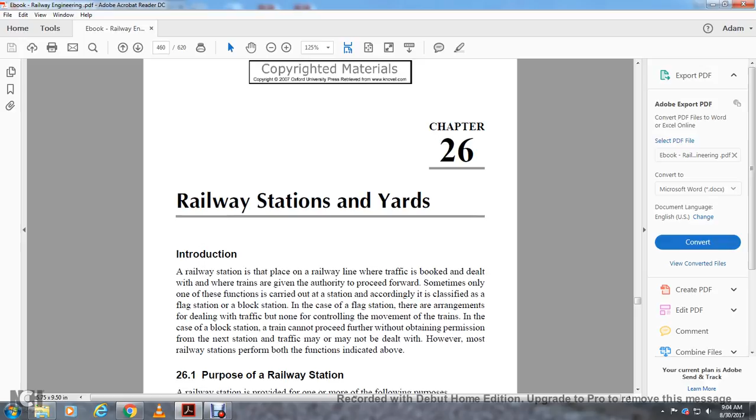In the case of the block station, the train cannot proceed further without obtaining permission from the next station. Traffic may or may not be dealt with; however, most railway stations perform both the functions indicated above.

26.1 Purpose of the railway station. Railway stations are provided for one of the following purposes: to entrain and detrain passengers, to load and unload goods and parcels, to control the movement of the trains, to enable the trains to cross each other in the case of a single line section, to enable the fast trains to overtake the slow ones, to enable the locomotive to refuel,

with diesel, water and coal, to attach and detach coaches and wagons to the train, to collect food and water for passengers, to provide facilities to change engines and crew staff, to enable the sorting of wagons and bogies to form new trains, and to provide facilities to give shelter to passengers in case of emergency, floods, accidents and disrupted traffic.

26.2 The selection of the site of the railway station. The following factors are considered in the selection of the site of the railway station. Adequate land. There should be adequate land available for the station building, not only for the proposed line, but also for future expansion of the area, which should be without any religious buildings and level.

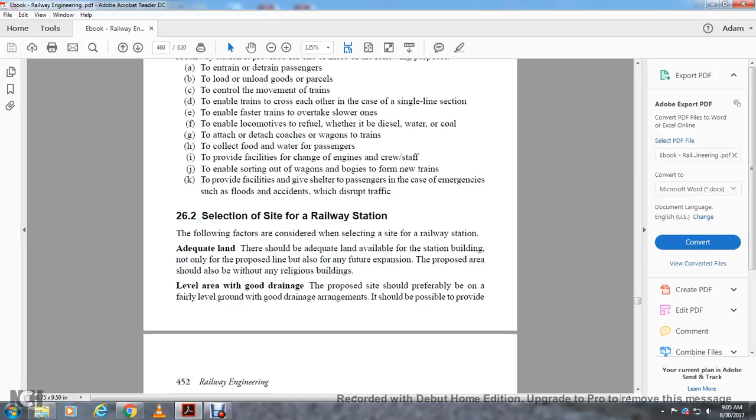Area with good drainage. The site should preferably be on fairly level ground, meeting the gradient requirements if possible. Provide the maximum permissible gradient in the yard. In India, the maximum permissible gradient adopted is about 1 in 400. A gradient of 1 in 1000 is desirable.

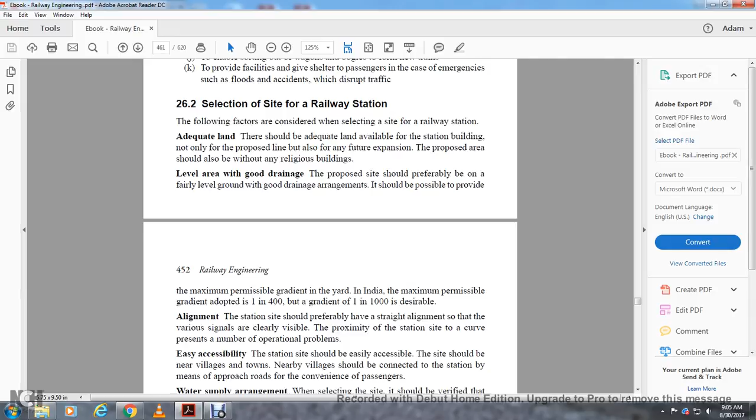Alignment. The station site should preferably be on a straight alignment so that the various signals are clearly visible on approach. If the station site is curved, it presents a number of operational problems. Easy accessibility. The station site should be easily accessible.

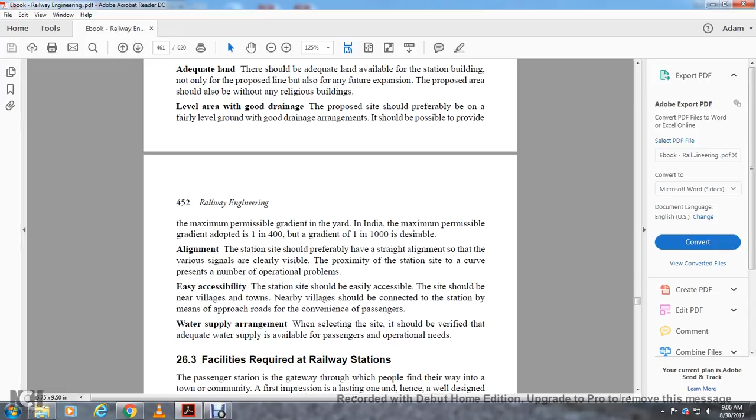The site should be near villages and towns, and nearby villages should be connected with the station by means of approach roads for the convenience of passengers. Water supply arrangement. When selecting the site, it should be verified that an adequate water supply is available for passenger and operational needs.

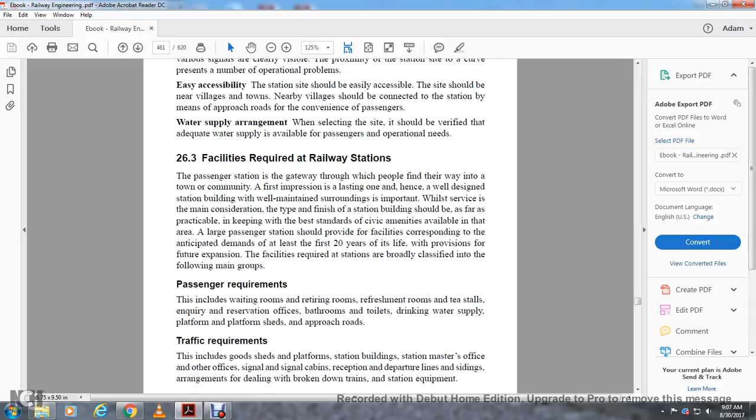A large passenger station is provided with facilities corresponding to the anticipated demands of at least 20 years of life and provision for future expansion. Facilities required in the station are broadly classified in the following main groups. Passenger requirements. This includes waiting rooms, retiring rooms, refreshment rooms, tea stalls, inquiry and reservation offices, bathrooms, toilets, drinking water supply, platforms, sheds, and approach roads.

Traffic requirements. This includes goods shed, platform, station building, station master's office, other offices, signal cabins, reception and departure lines, siding arrangements for dealing with broken down trains, and station equipment. Locomotive, carriage and wagon requirements. This includes locomotive shed, watering and fueling facilities, turntables, inspection pits, ash pits, etc.

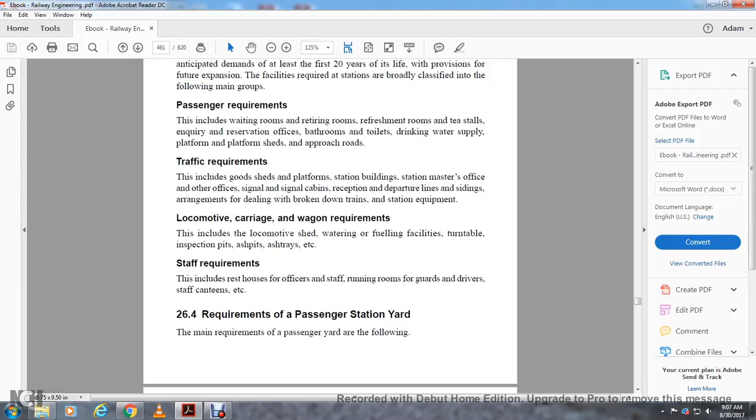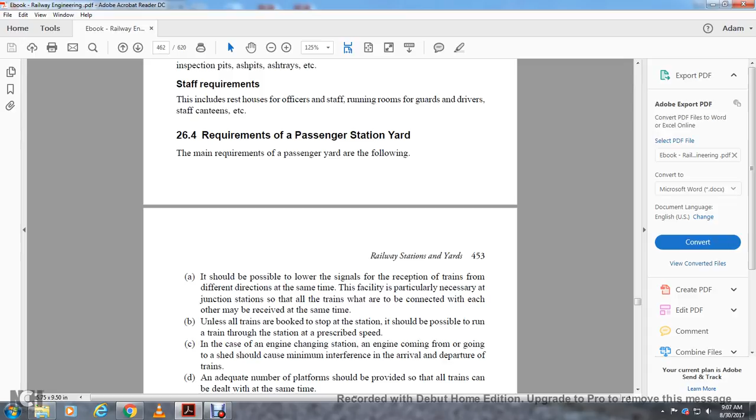Staff requirements. This includes rest houses for officers and staff, staff running rooms required for guards and drivers, canteens, etc. Requirements of the passenger station. The main requirements of the passenger station are as follows: it should be possible to lower the signals for reception of trains from different directions at the same time. Such facilities are particularly necessary at junction stations, so that at all times trains connecting with each other may be received at the same time.

Unless they are booked to stop at the station, it should be possible to run the trains through the station at the prescribed speed. The engine changing, engine coming from or going to the shed should cause the minimum interference with the arrival and departure of trains. An adequate number of platforms should be provided so that all the trains can be dealt with at the same time. There should be convenient sidings where extra carriages can be stabled, either to attach to or detach from the train.

There should be provision of facilities for dealing with specific traffic such as pilgrim and tourist traffic, parcels, wagons, livestock, and motor cars.

Stable lines, washing lines, sick lines, etc. should be provided as per requirement.

26.5 Classification of railway stations. Railway stations can be broadly sorted in various classes. The class is based on two main considerations: operational considerations. As per general subsidiary rules, Indian railway stations are classified into block stations and non-block stations. Block stations are further classified as A class, B class, C class stations. Non-block stations are classified as D class and flag stations.

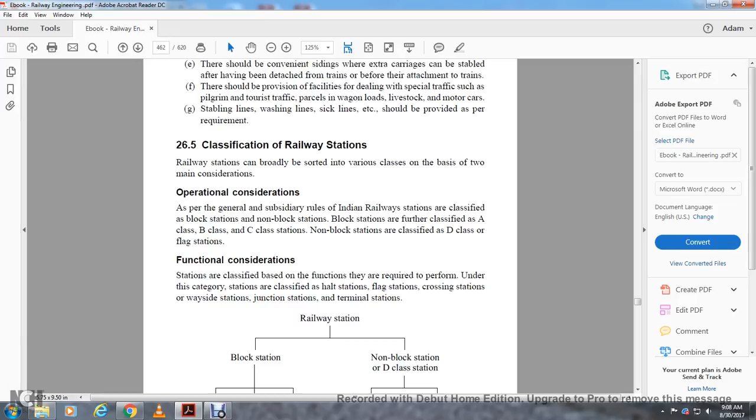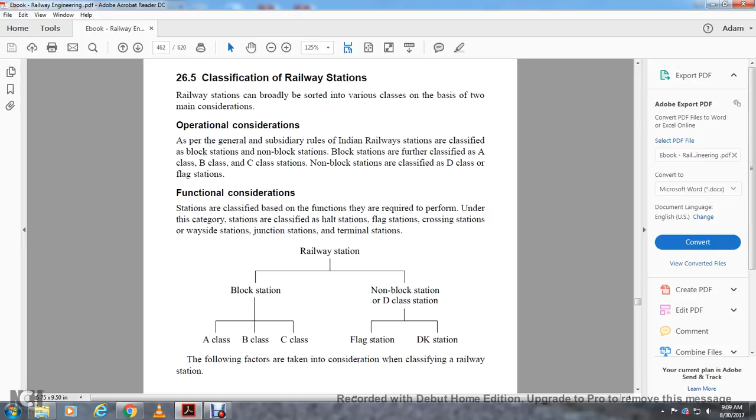Functional considerations. Stations are classified by the functions required to be performed under this category. Stations are classified into halt stations, flag stations, crossing stations, wayside stations, junction stations, and terminal stations. Railway station: block station, A, B, and C class. Non-block station: D class station, flag station, DK station.

The following factors are taken into consideration when classifying railway stations: less expenditure regarding the provision of the least number of signals, flexibility, shunting operation, increasing line capacity, faster movement of the train.

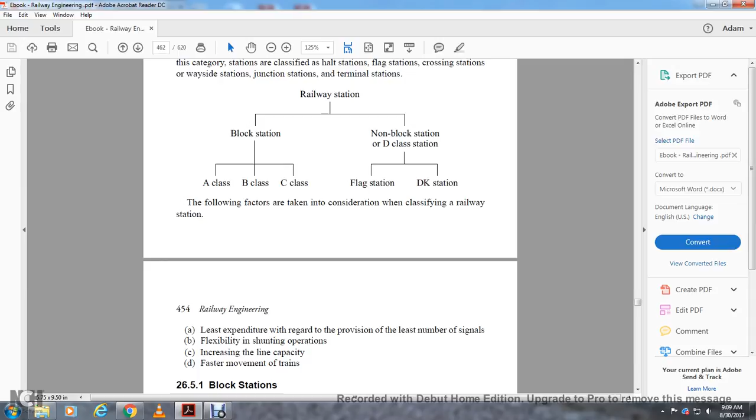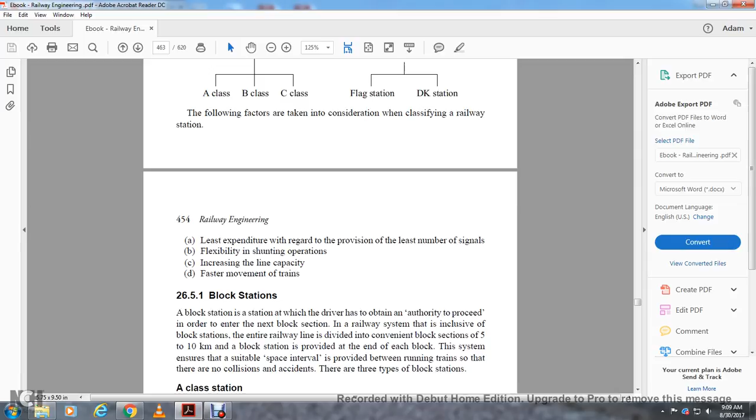26.5.1 Block Station. A block station is a station where the driver has to obtain authority to proceed in order to enter the block section. The entire railway line is divided into convenient block sections of 5 to 10 kilometers. Block stations are provided individually, each with the block instruments. The system ensures a space interval between running trains so that there are no collision accidents. There are 3 types of block stations.

The A-class station is normally provided on a double line section such that line clear cannot be granted to the rear station unless the line on which the train is received is clear and facing points are locked. No shunting can be done after the line clear has been granted. The A class station is suitable for sections where traffic passes rapidly, and it is essential for the driver of the train to have advance knowledge of the layout of the block station.

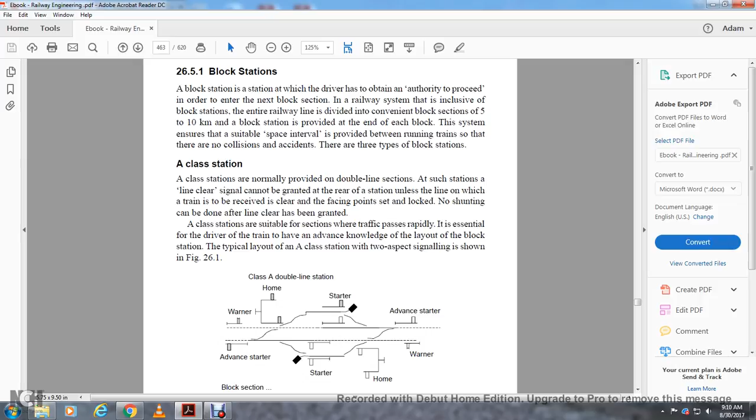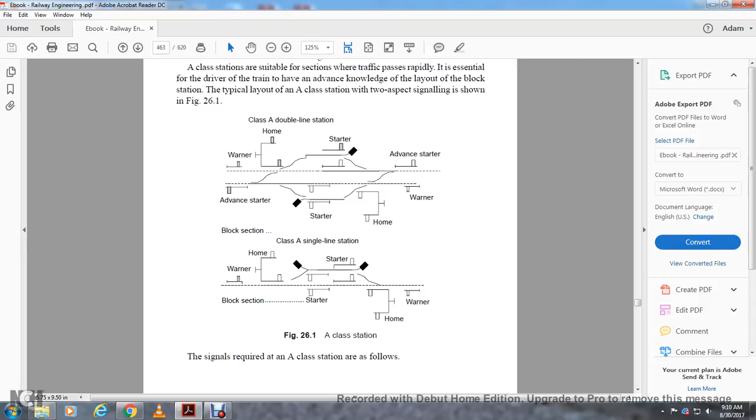The typical layout of the A-class station with 2 aspect signals is shown in Figure 26.1, which shows the A-class station: Warner, home, advanced starter, home, Warner, advanced starter, double line, class A; single line class A station: Warner, block section, home, starter, home, Warner. The signals required in the A-class station are as follows.

A Warner signal is placed at a warning distance from the home signal, and indicates whether the section beyond is clear. The home signal is the first stop signal. The starter signal is placed at an adequate distance from the home signal and marks the point up to which the line should be cleared before the train is given permission to approach. The advanced starter signal is optional, but allows drivers to further increase the speed of the train.

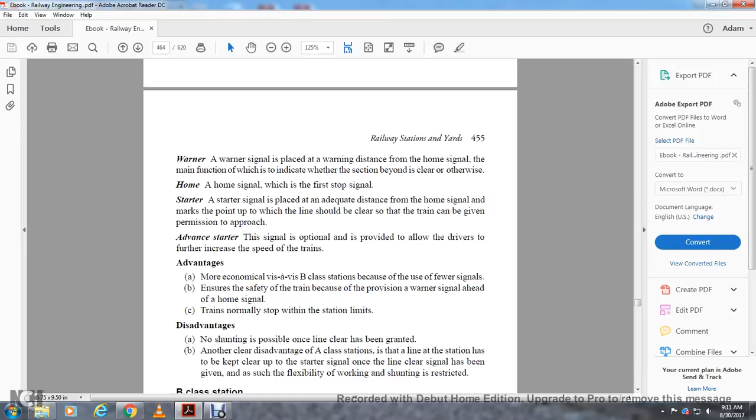Advantages: more economical than B class because of the use of fewer signals. Ensures safety of trains because of the provision of a warning signal ahead of the home signal. Trains normally stop within station limits. Disadvantage: no shunting is possible once line clear has been granted. Another disadvantage of the A-class station is that the line of the station has to be kept clear up to the starter signal once the line clear has been given, and as such, the flexibility of shunting is restricted.

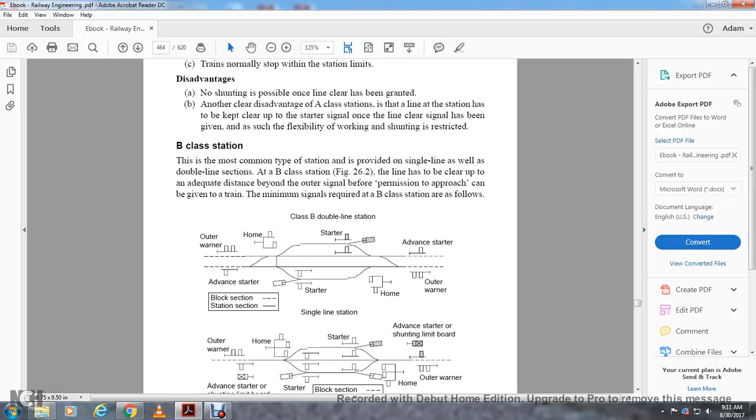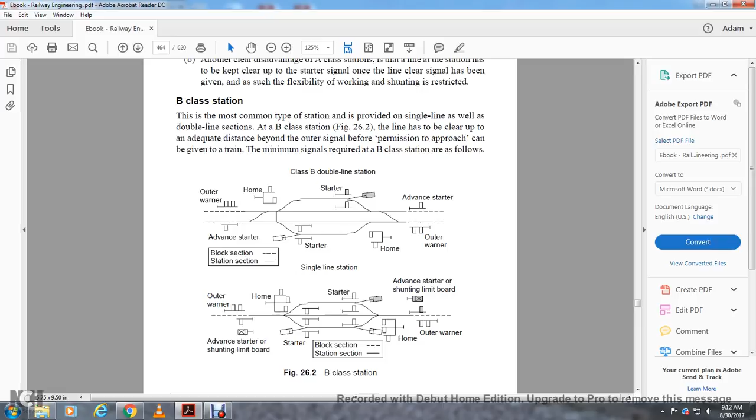Outer Warner, advanced starter, home, starter, home, advanced starter, outer Warner, class B double line station. Single line station: outer Warner, advanced starter, shunting limit board, home, starter, home, advanced starter, shunting limit board, outer Warner; block section is the dotted line, full line is the station section.

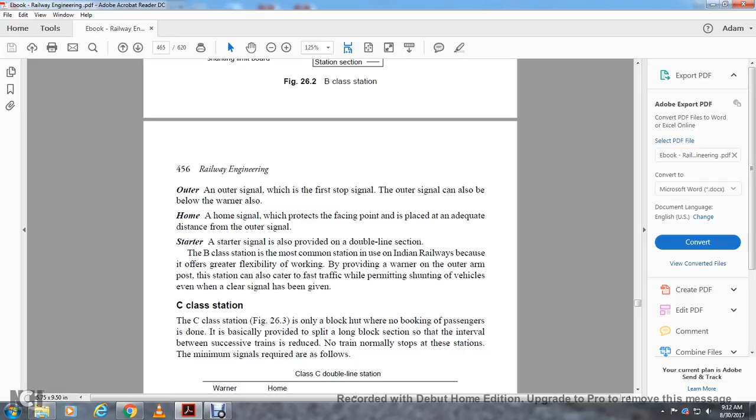The outer signal is the first stop signal. The outer signal can also have a Warner below it. The home signal protects the facing points and is placed at an adequate distance from the outer signal. The starter signal is provided on a double line section. The B class station is the most common type of station in Indian Railways because it offers greater flexibility in working, providing the Warner with the outer arm on the same post at the station. It can also cater to fast traffic while permitting shunting of vehicles, even when the line clear has been given.

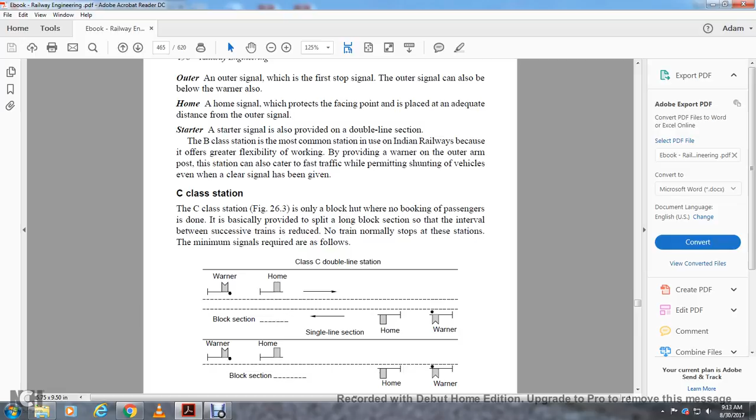Your Class C station is only a block hut where no booking of passengers is done. Basically, they are provided to split a long block section so that the interval between successive trains is reduced. No train normally stops at these stations. Minimum signals are required as follows. This shows the double line section: Warner, home, block section. Single line section: home, Warner, home, block section, home, Warner.

The Warner signal is placed with adequate warning for the home signal, indicating whether the section ahead is clear or not. The home signal is the first stop signal. The advantage of the C-class station is that it ensures faster movement of trains and increases line capacity. The disadvantage, however, is that no shunting is possible. Trains cannot stop at these stations.

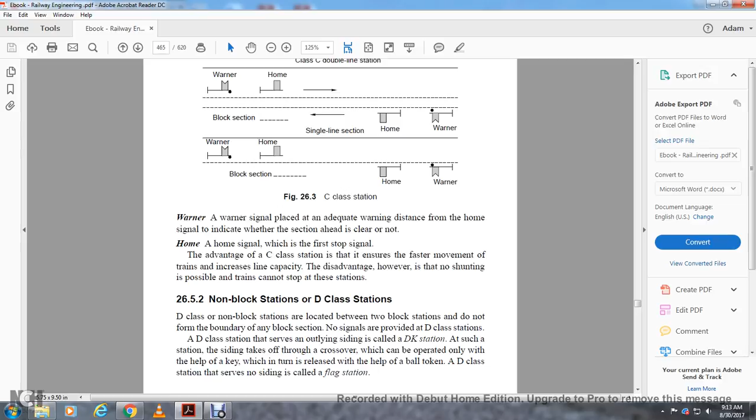26.5.2 Non-block stations or D-class stations. D-class or non-block stations are located between two block stations and do not form the boundary of any block section. No signals are provided in the D-class section. A D-class station serves as an outlying siding, which we call a DK station, such as a station siding or crossover, which can be operated only with the help of a key, the ball token release. A D-class station with no siding is a flag station.

A halt is simply a station where the train stops on the railway line. The halt is usually only a rail level platform, with a name board at either end, and sometimes a small waiting shed is provided with it. There is also a booking office. There is no yard or station building. Some selected trains are allotted stops at such stations to enable passengers to detrain.

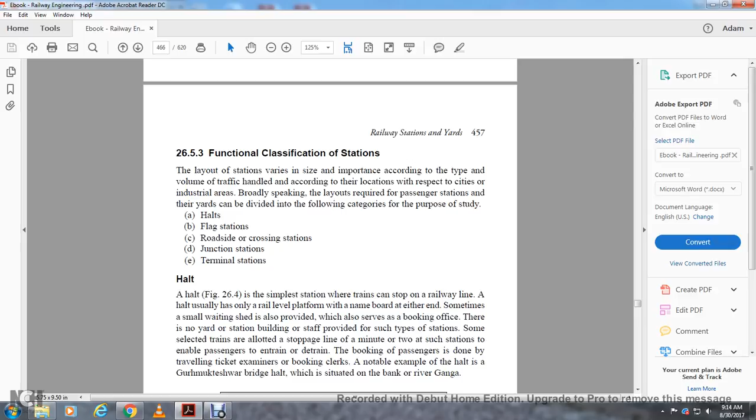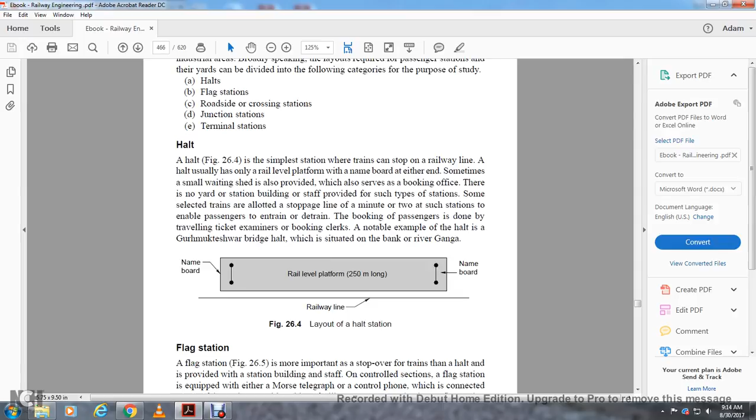The booking of passengers is done by travelling ticket examiners or booking clerks. An example of a halt is Gurhmukteshwar Bridge, situated on the bank of the Ganga. This shows the layout of the halt station: name board, rail level platform, rail line, name board.

Your flag station. The flag station is more important than the halt and is provided with a station building and staff. A flag station is equipped with a Morse telegraph or control phone, which is connected to the station on either side. Each flag station is usually provided with a small waiting hall, a booking office, platforms with benches, and arrangements for drinking water. Sometimes the flag station is also provided with a siding for stabling wagons booked for that station.

Some important tasks dealt with at these stations are the following. Operation work: the main operations performed at these stations include attending to the passing and crossing of trains, giving precedence to important trains, and other work related to the stopping of passenger trains. Most stop at small stations, whereas mail and express trains stop only at major stations. Goods traffic: these deal with parcel traffic only piecemeal. Wagon-load goods traffic is no longer being accepted at wayside stations, as per the new policy of the Railway Ministry with effect from December 1994.

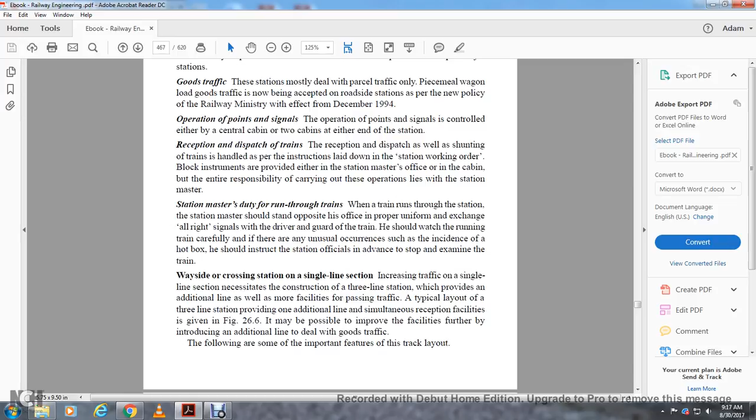When the train runs through, the station master is to stand opposite his office in proper uniform and exchange all right signals with the driver and guard of the train. He should watch the running of the train carefully. If there is an unusual occurrence, such as the incident of a hot box, he should instruct station officials in advance to stop and examine the train.

Wayside crossing station, single line section. Increasing traffic on the single line section creates the necessity for crossing stations, the construction of three-line stations which provide an additional line as well as more facility for passing traffic.

The typical layout of the three-line station provides one additional line with simultaneous reception facility, as given in figure 26.6, which makes it possible to improve facilities by further introducing additional lines to deal with goods traffic. Here are some more important features of the track layout.

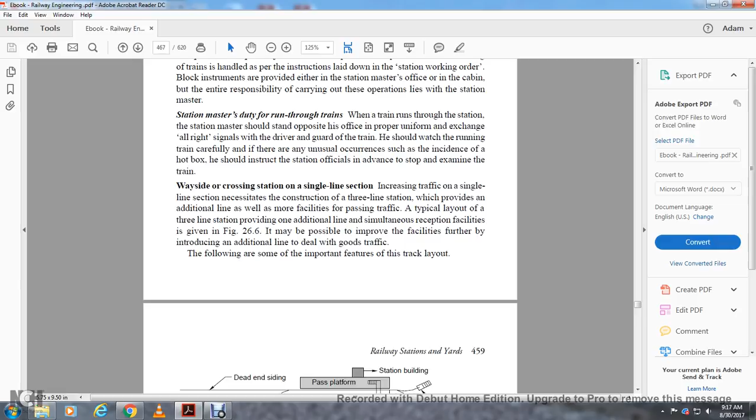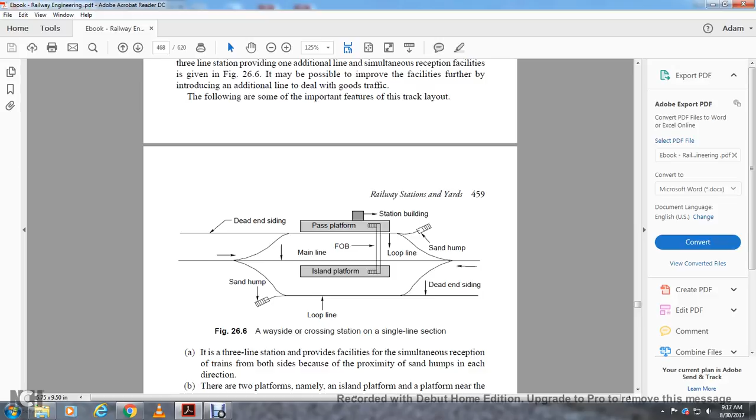Figure 26.6 is a wayside crossing station: single line, dead end sidings, coming-in line, sand hump, loop line, inside island platform, FOB, pass platform, station building, sand hump, loop line, and dead end siding.

It is a three-line station providing facility for simultaneous reception of trains, with sand humps on both sides in each direction. There are two platforms, namely the island platform and the platform near the station building.

The island platform can deal with two stopping trains simultaneously. Although goods trains also have to be stopped, they can be accommodated on the loop line with the platform, keeping the main line free from the rush of traffic.

The important trains that need to be halted can be made to halt on the platform near the station building. Dead end sidings on either side of the station accommodate wagons marked as sick.

The foot over bridge, or FOB, helps the passenger reach the island platform from the station building and vice versa.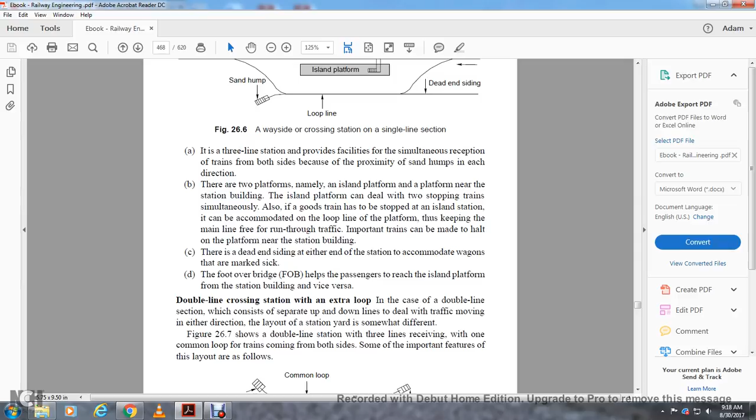Double line crossing station, extra loop. In case the double line section consists of separate up and down lines to deal with traffic moving in either direction, the layout of the station is somewhat different.

The double line station has three lines, receiving trains with one common loop from both sides. Some of the important features of the layout are as follows.

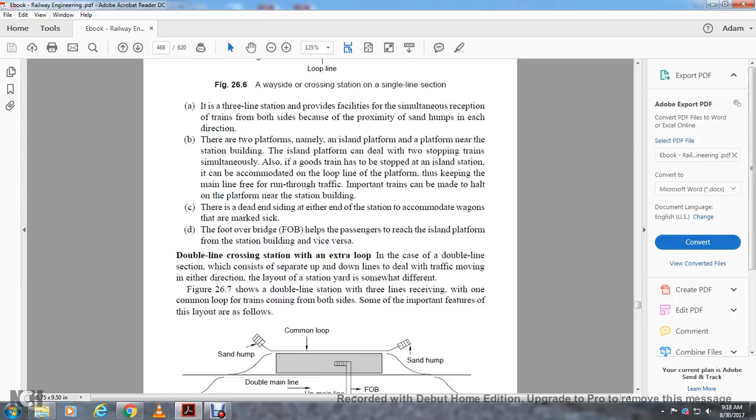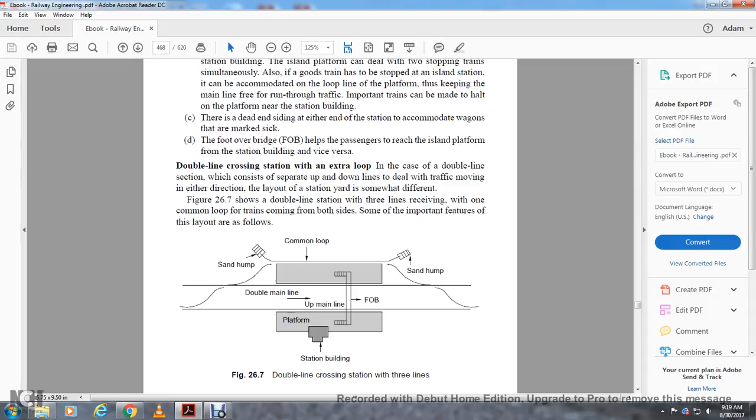In the double line crossing station, you have three lines: foot over bridge, platform, station building, the common loop, and the double main line - up and down main. There is a sand hump and common loop.

This wayside station on a double line section has almost minimum facility. In addition to the two main lines, up and down, there is a common loop to receive trains from either direction. Two of the three lines consist of two platforms - one island platform, the other beside the station. There is a foot over bridge to connect the station building with the island platform and back.

The emergency crossover is provided at either side of the station, and it can be converted into a single line station in case of emergency. Double line crossing station with four lines.

The most common layout of a station on a double line section is the four-line station, shown in figure 26.8. Important features of the layout are as follows. Figure 26.8 shows the double line crossing section with four lines.

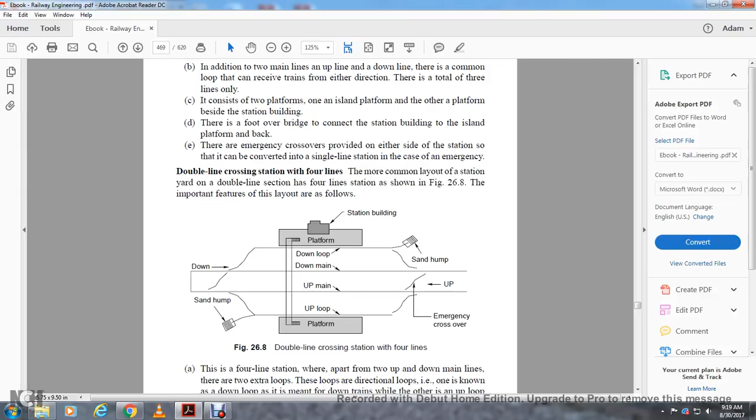The loops are directional loops: one is known as the down loop, meant for the down train, while the other is the up loop, meant for the up train. There are two platforms provided with connecting loops.

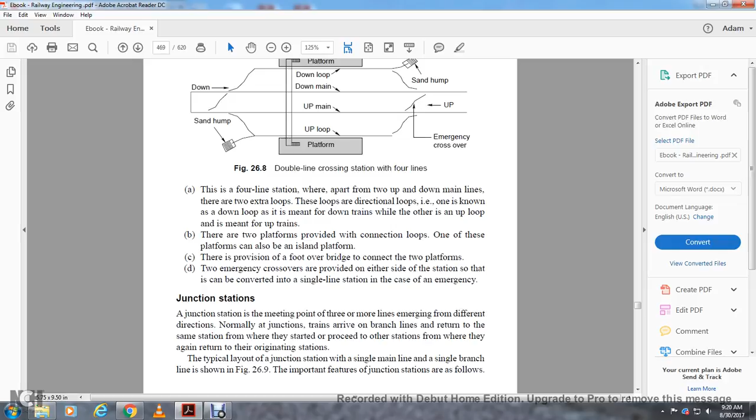One of these platforms should be maintained as the island platform. There is provision of a footbridge connecting the two platforms. The two emergency crossovers provided on either side of the station can be converted into a single line station in case of emergency.

Junction station: a junction station is the meeting point of three or more lines emerging in different directions. Normally, junction trains arrive at the branch lines, return to the same station from where they started, proceed to the other station, from which they again return to the original station.

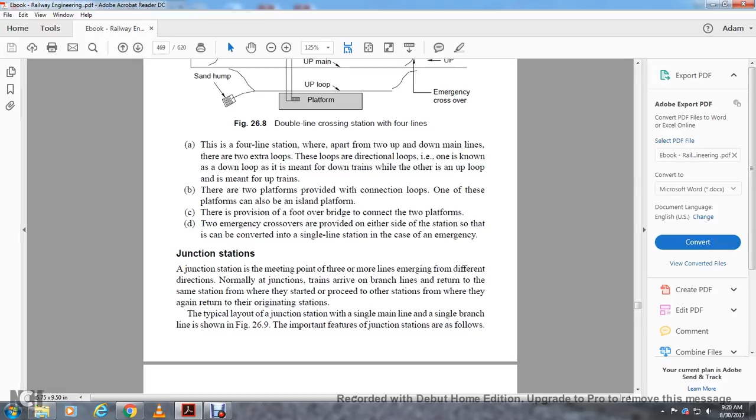The typical layout of the junction station, with a single main line and single branch line, is shown in figure 26.9. The important features of the junction station are as follows.

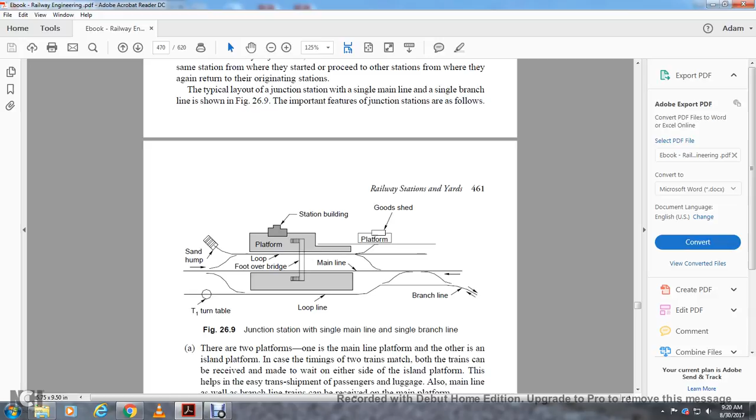Figure 26-9 shows the junction station with a single main line and single branch line. You have your T1 turntable, sand hump, foot over bridge, loop line, main line, platform, station building, goods shed, and branch lines. The two platforms: one is the mainline platform, the other is the island platform.

In case the timings of the two trains match, both trains can be received at either side of the island platform. This helps in easy transshipment of passenger luggage, and also the mainline as well as the branch line can be received at the main platform. A foot overbridge is provided for passengers to move between the station platform and island platform.

A small goods siding is provided on the loop platform to deal with goods traffic. The turntable is provided to reverse the direction of the engine if required. An emergency crossover is provided on either side of the station to help switch the single line in case of emergency. A few examples of junction stations: Ghaziabad, Allahabad, Itarsi, Nagpur, Jaipur.

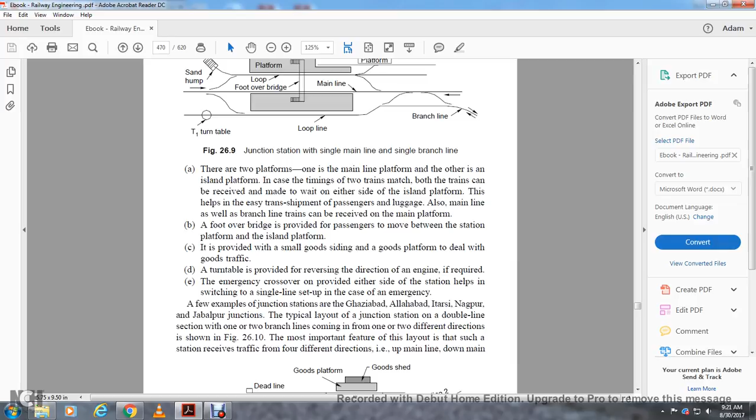The typical layout of a junction station with a double line section with one or two branches coming from one or two different directions is shown in figure 26-10. The most important feature of this layout is that the station receives traffic from four different directions: up main line and down main line.

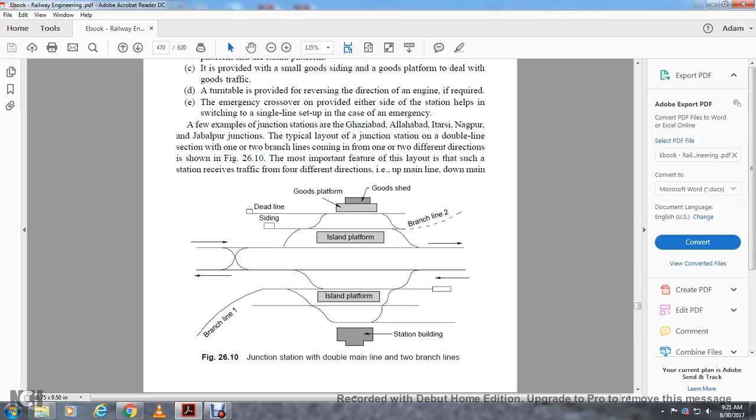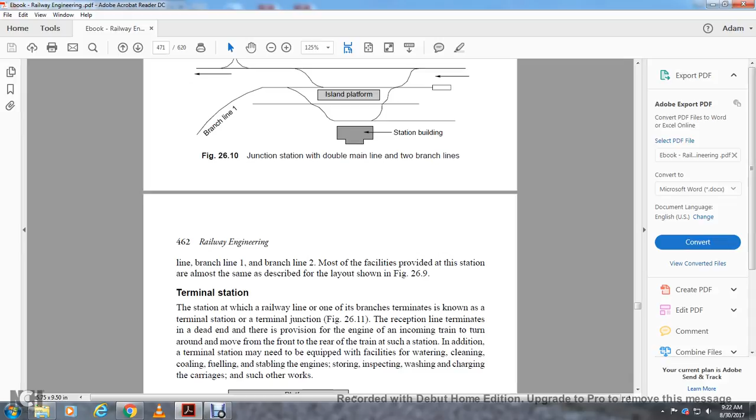Junction station, double main line, and two branches. Branch 1, branch 2, station buildings, goods sheds, goods platforms, dead line, siding, island platforms. Branch line 1, branch line 2 - most of the facilities provided in the station, almost the same as described in figure 26.9.

These are your terminal stations. A station where the railway line or one of its branches terminates is known as a terminal station, or terminal junction. The reception lines terminate at a dead end, and there's provision for the incoming engine to turn around, moving it from the front to the rear of the train at such stations.

In addition, the terminal station may need to be equipped with facilities for watering, cleaning, coaling, fueling, stabling, engine storing, inspection, washing, charging of carriages, and such other services.

Figure 26.11 shows the terminal station with a run-around line. Your concourse, platform, 3 platforms. Unimportant branch line terminal stations will have only one platform, whereas a big terminal station like Howrah and Mumbai station provides elaborate facilities.

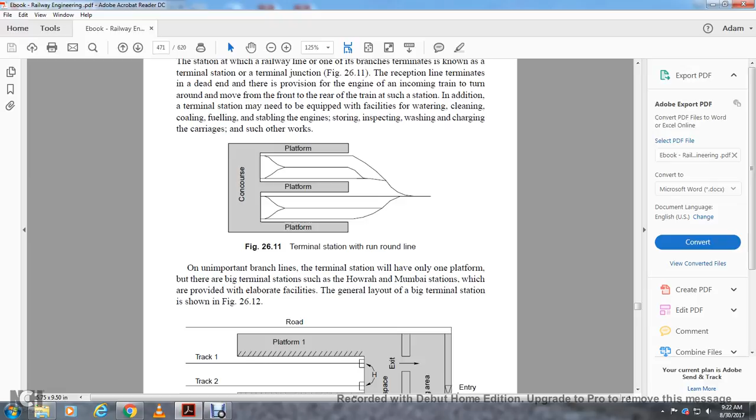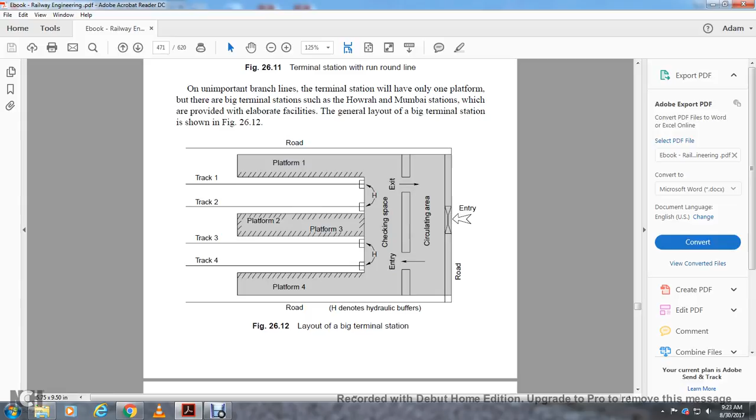General layout of the big terminal station: track 1 and 2 on platform 1 and 2, platform 3 and 4, track 3 and 4. H denotes the hydraulic buffers, the entry and exit of the circulating area, and entry and road.

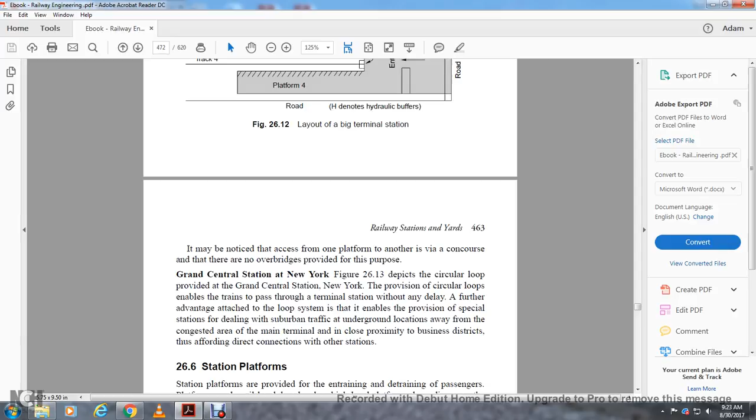The provision of circular loops enables the train to pass through the terminal station without any delay. A further advantage attached to the loop system is that it enables provision for special stations dealing with suburban traffic, at underground locations away from congestion, with the main terminal in close proximity to the business districts, affording direct connection to other stations.

26.6 Station platforms. Station platforms are provided for entraining and detraining passengers. Platforms can be rail level, low level, or high level, depending upon the expected passenger traffic.

The general policy of the Indian Railways is to provide a high-level platform at all important mainline stations, low-level platforms at less important mainline stations, and rail-level platforms at unimportant wayside stations. Rail-level platforms coincide with the rail level; low-level platforms are at a height of 1 foot 6 inches; high-level platforms at 2 foot 6 inches to 2 foot 9 inches for broad gauge lines, and 1 foot to 1 foot 4 inches in case of meter gauge.

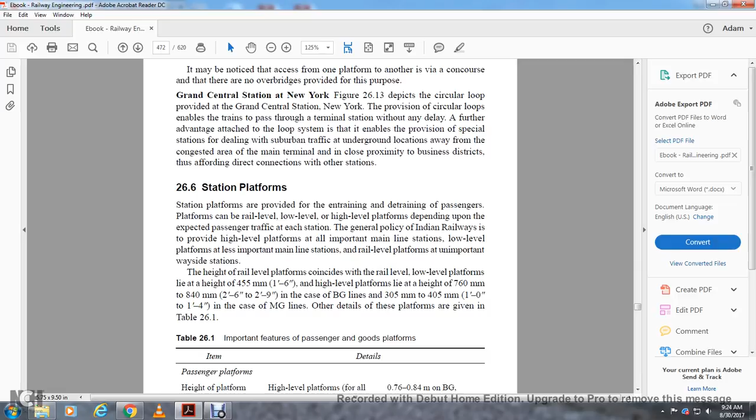Other details of these platforms are given in Table 26.1.

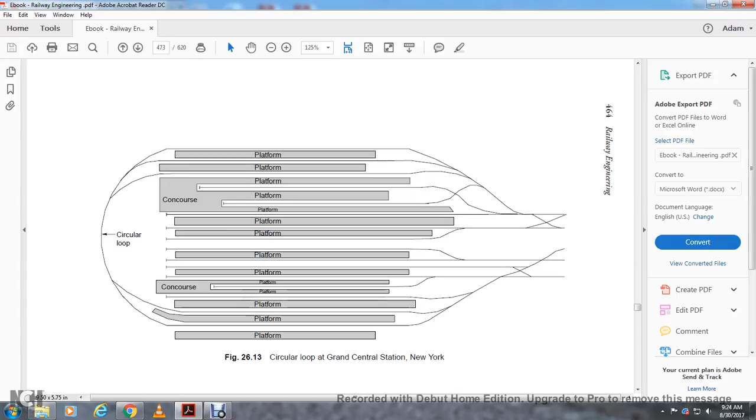This shows you the circular loop of the Grand Central Station in New York, showing the circular loop and all the platforms in the two concourses.

26.7, the main building area - different types of stations. The main facilities provided at a small station include the waiting hall, the booking hall, and the office of the assistant station master, ASM, along with a different design that has been standardized for the station.

Various railways provide all facilities required for small and medium-sized stations, considered alongside big stations. However, the design of individual station buildings has been drafted based on passenger requirements, taking into regard the architectural features. Central Railways have prepared type drawings for wayside stations providing different facilities and different types of station buildings, summarized in table 26.2.

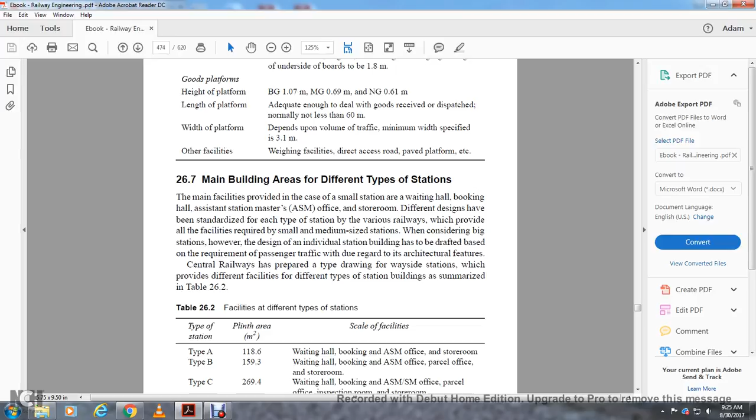Different types of stations: type A, type B, type C, type D.

26.8, types of yards. A railway yard is laid out to deal with passengers as well as goods being handled with the railway. The yards include receipt, dispatch of the trains and dealing with marshalling and other functions.

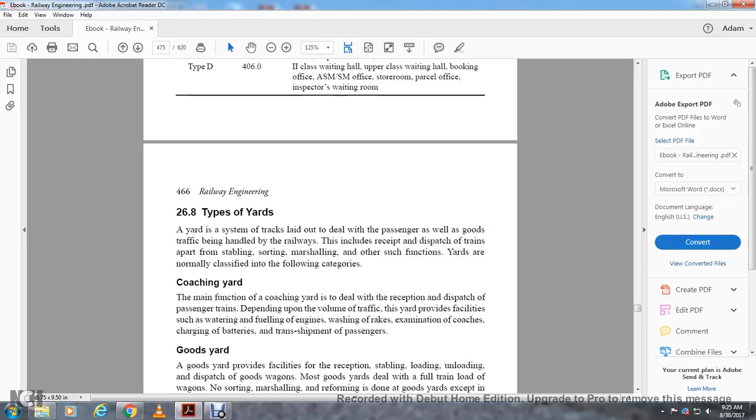Yards are normally classified into the following categories. Coaching yard: the main function of the coaching yard is to deal with the reception and dispatch of passenger trains depending on the volume of traffic. The yard provides facilities such as watering, fueling engines, washing rakes, examining coaches, charging batteries, and transshipment of passengers.

Goods yards are provided with facilities for reception, stabling, loading, unloading, and dispatching goods wagons. Goods yards deal with full train loads of wagons; no sorting, marshalling, or reforming is done in goods yards, except for the case of sick wagons or a few wagons booked for a particular station. Separate goods sidings are provided with platforms for loading and unloading, with the goods being handled at the station.

Marshalling yard: a goods yard which deals with the sorting of goods wagons and forming new trains is called the marshalling yard. This is discussed in section 26.8.1.

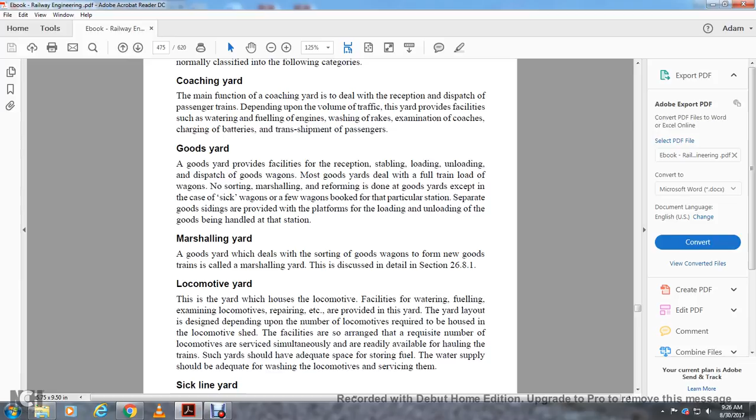Locomotive yard: this is the yard which has locomotive facilities for watering, fueling, examining, and repairing locomotives. The yard layout is designed depending upon the number of locomotives required for the shed. Facilities are arranged so that the requisite number of locomotives serviced simultaneously are readily available for hauling trains. Such yards should have adequate space for storing fuel, and the water supply should be adequate for washing and servicing locomotives.

Sick line yard: whenever a wagon or coach becomes defective, it is marked sick and taken to the sick line yard, which deals with such sick wagons. Adequate facilities are provided for repair of coaches and wagons, including examination pits, crane arrangements, the train examiner's office, and a workshop. A good stock of spare parts should be available with the train examiner for repair of defective rolling stock.

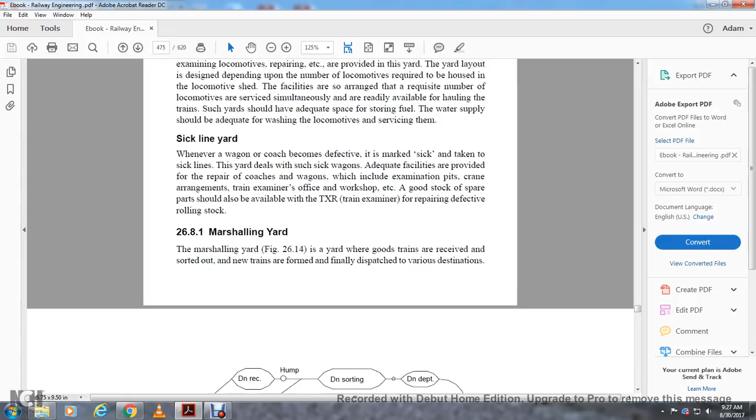The marshalling yard is where goods trains are received and sorted to form new trains for dispatch to various destinations. The figure shows a typical marshalling yard with common sorting yard layout.

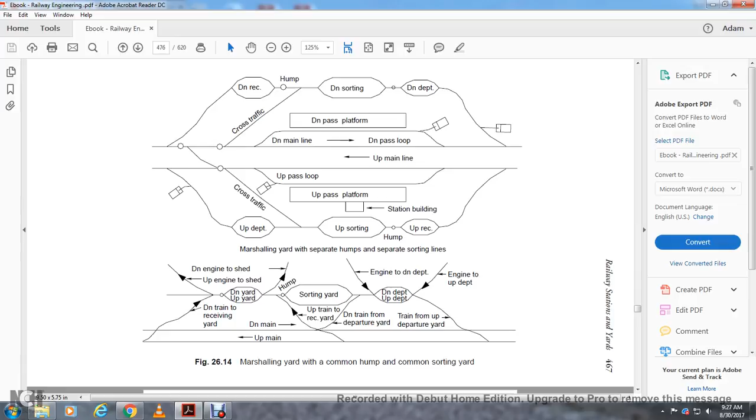This yard receives loaded and empty goods wagons from different stations for booking to different destinations. Wagons are separated, sorted, and properly marshalled. Finally, the fully formed train is dispatched bearing the various destinations.

Marshalling of the train is done so that wagons can be conveniently detached without much shunting en route at wayside stations. The marshalling yard serves the following functions at specified locations within the yard itself.

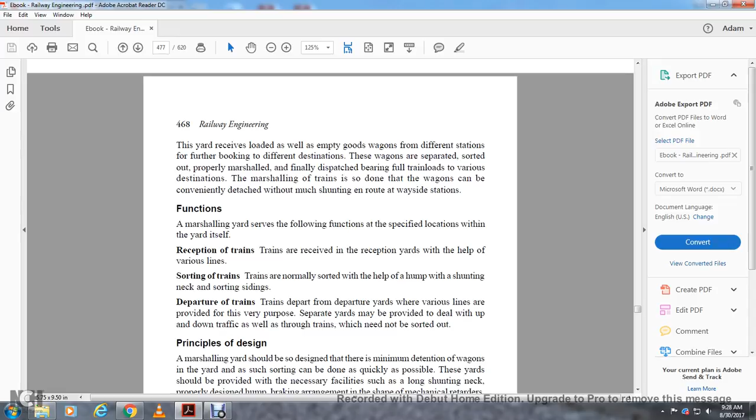Reception of trains: trains are received at the reception yard with the help of various lines. Sorting of trains: trains are normally sorted with the help of humping and shunting at the neck and sorting sidings.

Departure of the train: the train departs from the departure yard, where various lines are provided for various purposes. Separate yards may be provided to deal with up and down traffic, as well as through trains which do not need to be sorted.

Principle of design: the marshalling yard should be designed so there is minimum detention of wagons, and sorting can be done as quickly as possible. The yard should be provided with necessary facilities such as a long shunting neck, a properly designed hump, and braking arrangements in the shape of mechanical retarders, depending upon the volume of traffic.

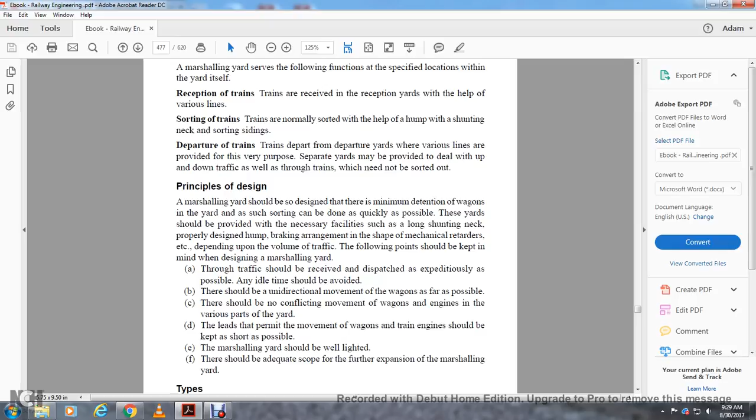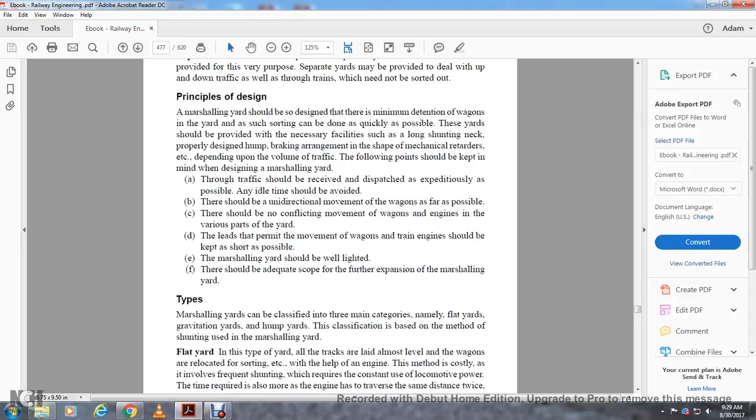Marshalling yards can be classified in three main categories, namely flat yards, gravity or gravitation yards, and hump yards. The classification is based on the mode of shunting used in the marshalling yard. A flat yard is a type of yard where all the tracks are laid almost level, and the wagons are relocated and sorted with the help of the engine.

The method is costly, as the frequent shunting involved requires constant use of locomotive power. The engine has to traverse the same distance twice: first carrying the wagons to the place in the yard, and then returning idle into the yard. This arrangement is therefore adopted when there are space limitations and the number of wagons dealt with in the marshalling yard is very low.

Gravitation yard. In this yard, the level of the natural ground is such that it is possible to lay some of the tracks on a gradient, so that the wagons move to the sidings for the purpose of sorting with the action of gravity. Sometimes shunting is done with the help of gravity assisted by engine power. However, very seldom is the natural ground level suitable for a gravitation yard.

Hump yard. In this yard, an artificial hump is created by means of proper earthwork. The wagons are pushed up to the summit of the hump with the help of the engine, and from there they slide down to reach the sidings by the effect of gravity. The hump yard, therefore, can be said to be a gravitation yard, as shunting is done with the effect of gravity.

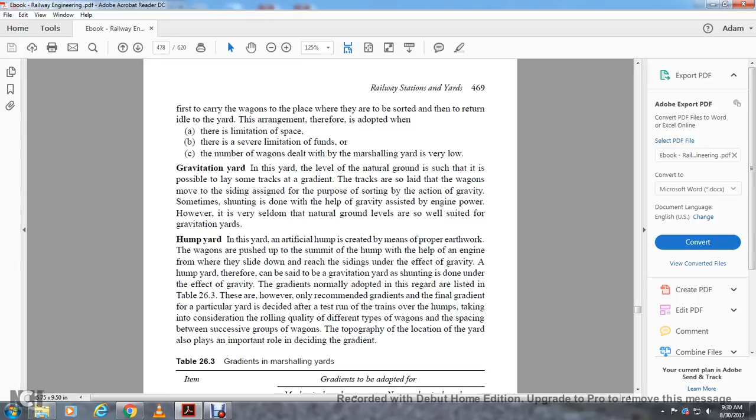Gradients normally adopted are listed in Table 26.3. However, these are only recommended gradients, and the final gradient in a particular yard is decided after a test run of trains over the hump, taking into consideration the rolling quality of different types of wagons, spacing between successive groups of wagons, and the topographical location of the yard, which also plays an important role in deciding the gradient.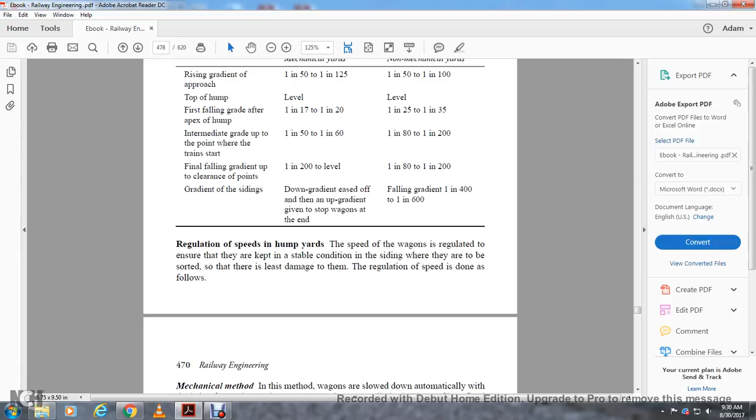Regulation of speed in the hump yard. The speed of the wagons is regulated to ensure they reach the siding where they are to be sorted in a stable condition, so that there is the least damage to them. The regulation of speed is done as follows. Mechanical method: the wagon is slowed down automatically with the help of retarders. Retarders are normally shaped as bars fixed on either side of the track, operated electrically or electromechanically, which resist the movement of the wagon by pressing against the sides of the moving wheels, finally stopping the wagon at the appropriate place.

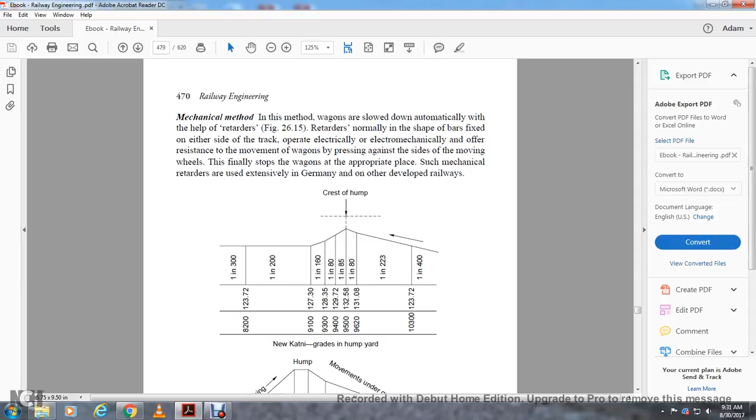Such mechanical retarders are used extensively in Germany and other developed railways. This is New Katni grades in hump yard. Gradients of a mechanical hump yard: pushing 1 in 40, level, 1 in 20, 1 in 100, and 1 in 300, with movements of up and down gradients.

Non-mechanical yard. In a non-mechanical yard, the speed of wagons is regulated manually with the help of handbrakes. The shunting staff runs alongside the wagons and applies the handbrake at the appropriate place, making the wagon slow and stop. Skids are also used to slow down the wagon. Skids are placed on the track and get dragged with the rolling wagon; friction develops, reducing the speed of the wagon so it stops in the desired location.

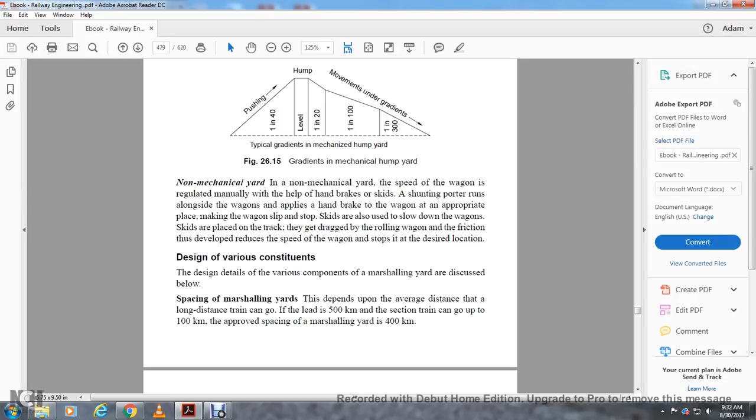Design of various components. Design details of the various components of the marshalling yard are discussed. Spacing of marshalling yards depends on the average distance that a long distance train can go. This is up to 500 kilometers. A section train goes up to 100 kilometers. Approved spacing for marshalling yards is 400 kilometers. Siting of the marshalling yard: a marshalling yard is normally sited at a junction point, near a group of collieries, the feeder yard of a big terminal, or a steel plant.

Reception yard: the number of lines to be included in the reception yard depends upon the number of trains to be received and the frequency of their arrival. Normally one reception line is proposed for every 3 or 4 trains. The approved length of the siding is normally 700 meters for broad gauge and 650 for meter gauge. Shunting neck: the length of the shunting neck should be longer than the longest train.

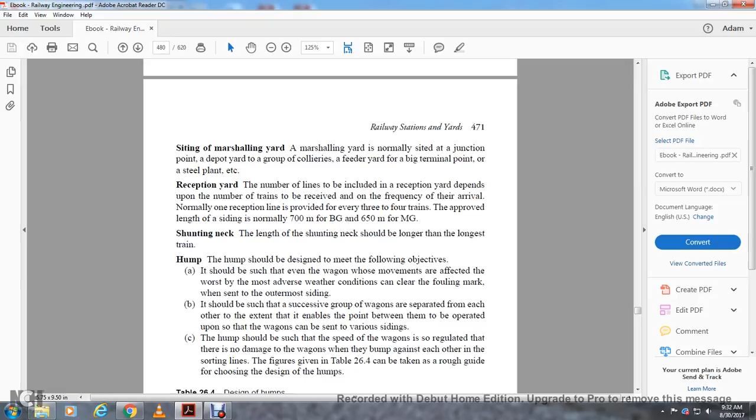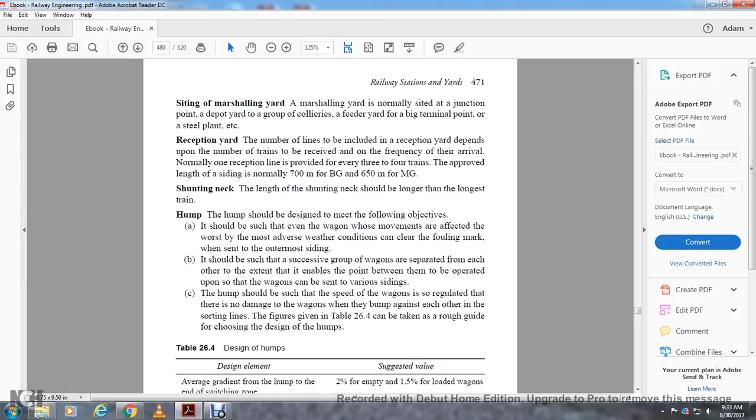The hump should be designed to meet the following objectives. It should be such that each wagon moves effectively, even in the most adverse weather conditions, clear of the fouling mark of the outermost siding. Successive groups of wagons should be separated from each other to an extent that enables the points between them to be operated upon for subsequent wagons to be sent to the various sidings. The hump yard should be such that the speed of the wagons is regulated with no damage to wagons as they bump against each other on the sorting lines. Table 26.4 can be taken as a rough guide to the design of the hump.

Design of hump. Designing element. Average gradient of the hump at the end of the switching zone: suggestion for 2% empty, 1.5% loaded. Average height of the ordinary hump: 2.5 to 3 meters, or 8 to 10 feet. Average height of the mechanized hump: 12 to 20 feet.

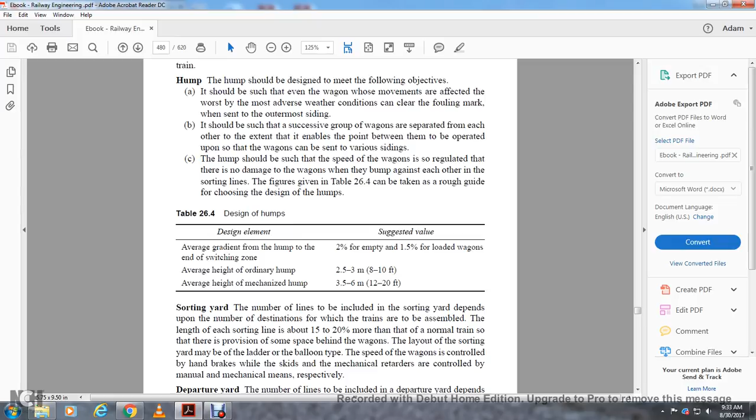Sorting yard. The number of lines included in the sorting yard depends on the number of destinations for the trains to be assembled. The length of each of the sorting lines is about 15 to 20% more than the normal train length, thereby provisioning for some wagons left behind. The sorting yard may be laddered or balloon. Speed of the wagons is controlled by handbrakes, skids and mechanical retarders, controlled manually and mechanically, respectively.

Departure yard. The number of lines included in the departure yard depends on the number of trains dispatched from the yard and the frequency of departure. Some engineers feel that there is no need for a separate dispatching yard because it unnecessarily increases the length of the marshalling yard. According to them, trains should be dispatched straight from the sorting lines. This arrangement, however, runs into the problem of departing trains being delayed on account of operational reasons.

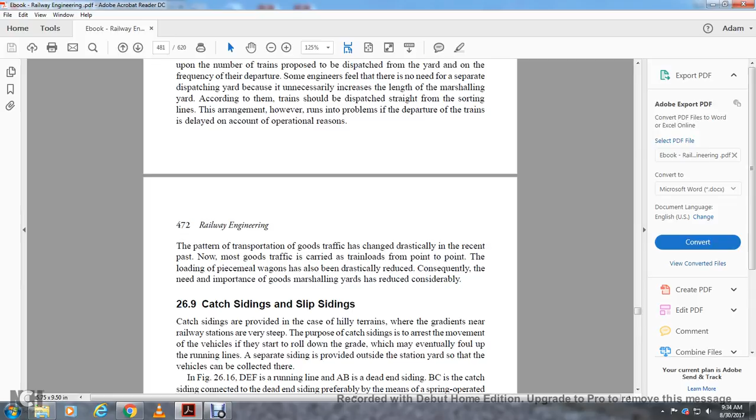The pattern of goods traffic transportation has changed drastically recently. Now most of the goods traffic is carried in train loads from point to point. Piecemeal wagon loads have also drastically reduced. Consequently, the need and importance of the goods marshalling yard has reduced considerably.

26.9 Catch sidings and slip sidings. Catch sidings are provided in the case of hilly terrains where the gradients near the railway station are very steep. The purpose of catch sidings is to arrest the movement of vehicles if they start to roll down the grade, which may eventually foul the running line. A separate siding is provided outside the station yard so that the vehicles can be collected there.

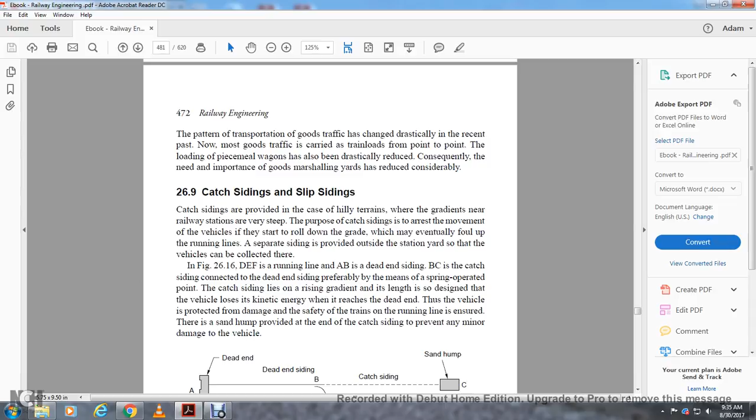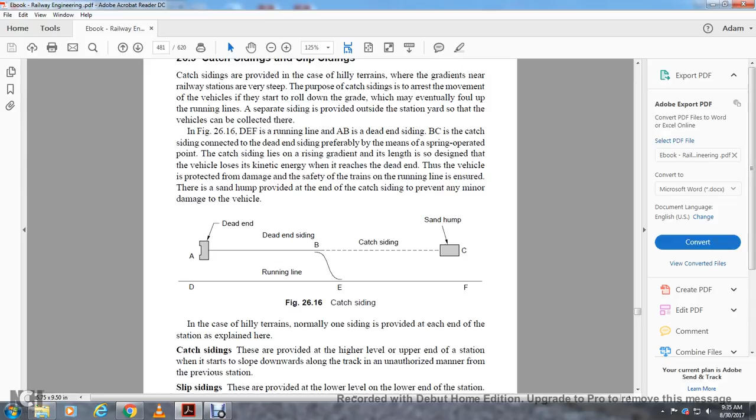In Figure 26.16, DEF is the running line AB, a dead end siding BC is the catch siding, with the connection to the dead end preferably by means of a spring operated point. The catch siding lies on a rising gradient with the length so designed that the vehicle loses its kinetic energy before reaching the dead end. The vehicle is protected from damage and the safety of the running line is ensured. A sand hump is provided at the end of the catch siding to prevent minor damage to the vehicle. Figure 26.16 shows the catch siding, dead end siding, running line, A, B, C, sand hump, catch siding, D and E running line, D and F running line.

In the case of hilly terrain, one siding is provided at each end of the station, as explained here. The catch siding is provided at the higher, upper end of the station, which starts with the slope downwards, to catch unauthorized vehicles from the previous station. Slip sidings are provided at the lower end of the station. If there is a chance the vehicle is not caught by the catch siding at the entry of the station, it will be caught and slipped into the slip siding.

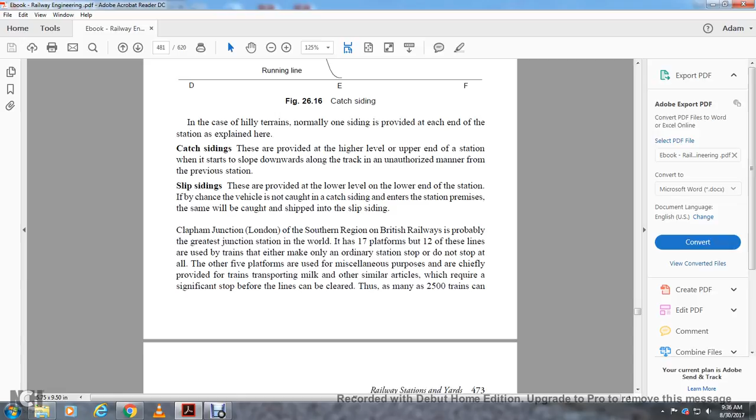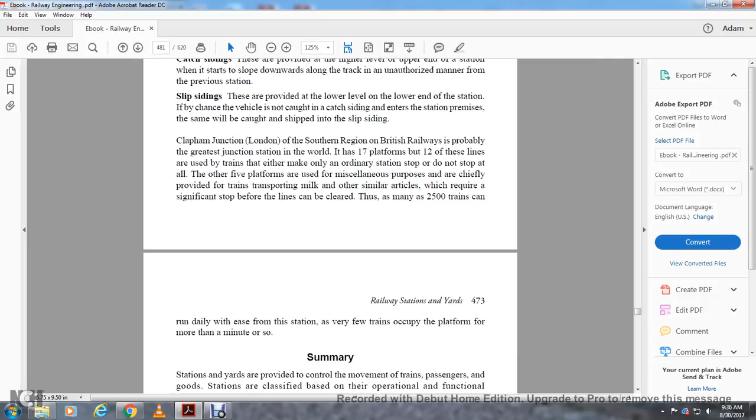Clapham Junction, London, in the southern region of British Railways, is probably the greatest junction station in the world. It has about 17 platforms, but 12 of these lines are used for trains that make only ordinary station stops. The other platforms are used for miscellaneous purposes, such as transportation of milk and other similar articles where required. About 2,500 trains can be run daily with ease from the station. Few trains occupy the platform for more than a minute or so.

Summary: stations and yards are provided to control the movement of passenger and goods trains. Stations are classified based on operational and functional characteristics. The facilities provided at a station depend on the type of station. Yards are classified as coach yards, goods yards, marshalling yards, and locomotive yards, depending upon their purpose. An efficient station largely depends on the efficiency of its yards. Chapter 27: Equipment at railway stations.